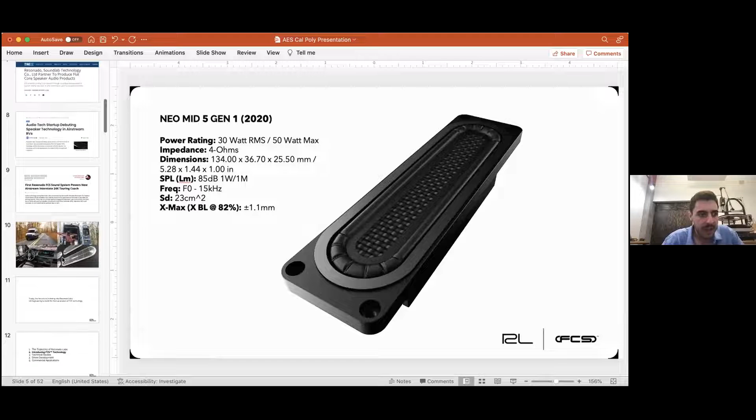This is the first transducer we developed. We call it the Neo Mid 5 Gen 1. We're working on a wide range of Gen 2 transducers, but this is the Gen 1 and a little bit of a fancy graphic. That Gen 1 transducer has been featured in Airstream RVs. Airstream is a premium brand of recreational vehicles, maybe considered top of the line, and this shows a few pictures of the Resonado sound system in the back of the doors.

We are working on a number of commercial applications beyond this that are more integrated into home audio. There's a very exciting soundbar project I want to talk about at the end of the presentation, and we'll look at that from the practical standpoint. That is using a very cool speaker driver we've engineered called the NW7, and it's a really good representation of FCS technology.

I'm also in Resonado's acoustic lab. This is the measurement component. We have a subjective listening room on the other side of that wall, but there's a few different pieces of equipment in here. Most of them are laser microphone setups that measure the displacement of the speaker and the input. We have what's called the Klippel system. Klippel is a German company founded by Wolfgang Klippel. Does anyone know who Wolfgang Klippel is, or have they heard of him?

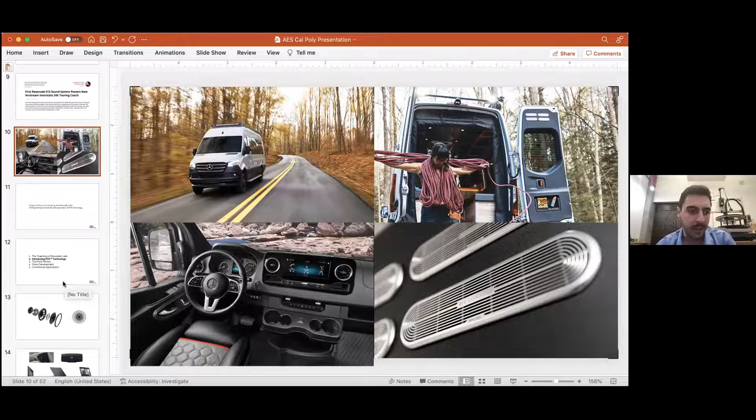But to get into the next part of the presentation, for the last many years, in all types of consumer electronics products, they're using just conventional circular speaker drivers. This is something we pulled out of a Google smart speaker; I just grabbed it from our shelving system where we have a lot of benchmarks. This conventional circular speaker driver design is very ubiquitous across the industry.

You have right here the speaker voice coil, right? This is the spider. The spider's the bottom part of the suspension. Then you have the speaker cone, and on the speaker cone is this surround. That's the second part of the suspension. Typically, most of the stiffness or compliance of a speaker driver suspension is in the spider component.

The spider is typically cotton, synthetic fabricated cotton, all sorts of special phenols, and it's impregnated with different materials to get certain stiffness parameters. That's where a lot of the compliance or stiffness of the speaker comes from. This is your magnet, and you have your pole plate.

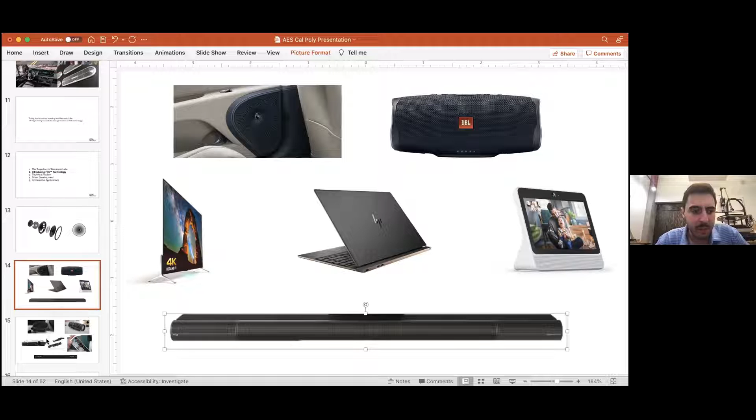The conventional circular transducer has been used for decades, but with all these products there are new form factors. They've required the use of what we call a high aspect ratio speaker: racetrack shape, basically non-circular. The reason you do this, take sound bars for example. Sound bars are a device a lot of people have in their homes now. I have a Klipsch Cinema 800 soundbar, and 80% of the people at Resonado have soundbars in their homes.

The trend with soundbars over the last 10 years is reducing the height. You want it to be a sleek design, fit under the TV, and not interfere with the TV IR reader. So the max height is pretty much 2.9 inches, but everyone's been trying to go lower and lower.

But when you reduce a soundbar's height, to maintain output and low frequency bandwidth, by output I mean SPL, your volume level, and by low frequency bandwidth your bass, your low end, you need to maintain cone area and displacement. To do that, everyone takes the circular driver and just elongates it, and you get a much more rectangular thing like this TV speaker.

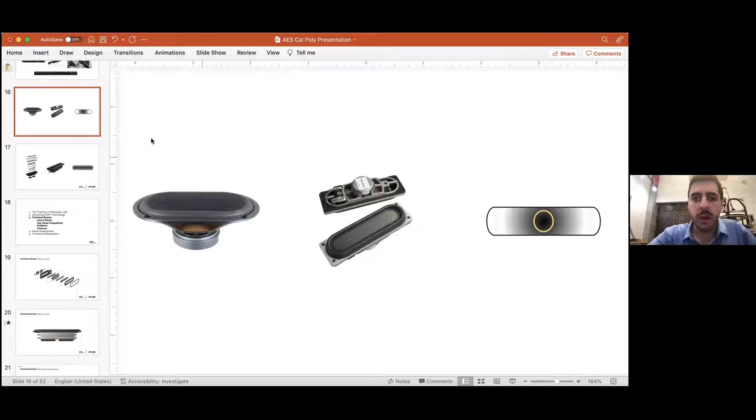When you go to a driver like this or like this, this one drops off at like 4 kilohertz, for example. And so you're losing all that response from 4 kilohertz to 20 kilohertz. And it's pretty easy to add a tweeter, and tweeters are low cost. That's what we see in a lot of cases, but there's also just a lot of distortion and negative effects from this.

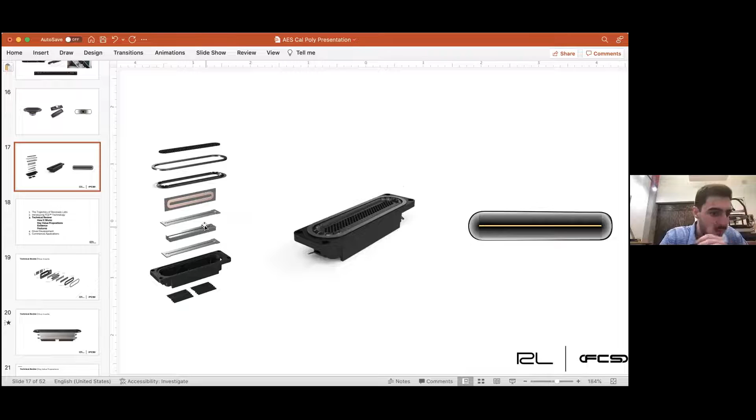And what FCS technology does, what Resonado has been focusing on, is we rearrange and optimize the geometry of each component, kind of as you were saying, Alex, from the ground up. The key component is we're taking the voice coil from this cylindrical structure, and we're putting it on a planar bobbin and winding it like this. And so you get 2 magnetic gaps.

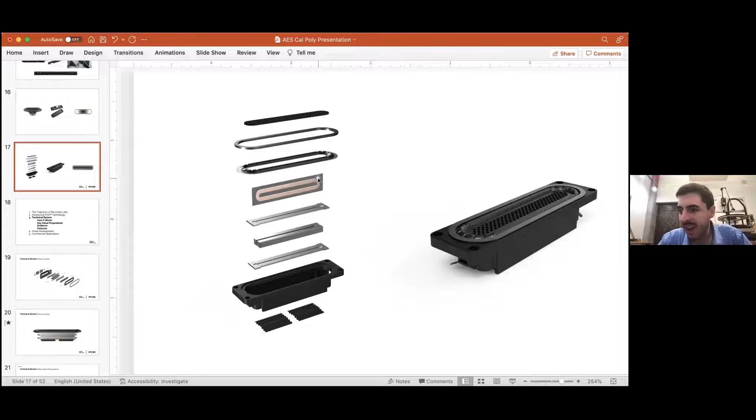Electromagnetics is not my specialty or my expertise, but you basically have this voice coil, and it sits in, these are 2 parallel bar magnets, and then you have your 2 pole plates or 2 yokes. And this voice coil goes up and down in there, and the bobbin supporting that diaphragm is along the entire length of the voice coil. And so you can drive the speaker much more planar and much more linearly.

And this page is talking about each of the parts, and we're gonna go through some of the components right now. But the big value proposition is the fact that we're driving the cone, the diaphragm, with the entire length of the voice coil, the entire length of the bobbin. The bobbin is what the coil sits on, that substrate, it's aluminum.

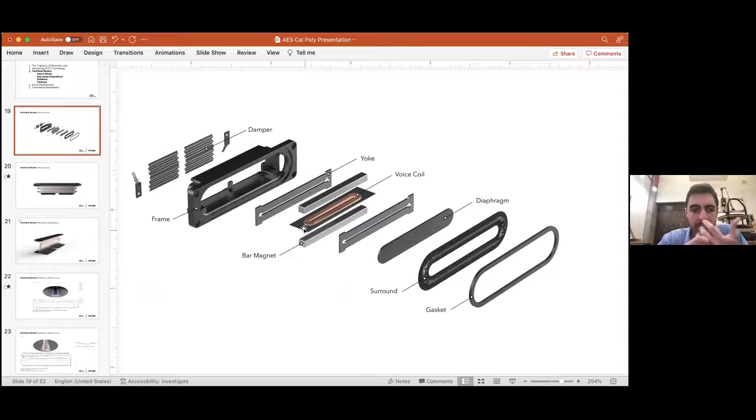To prove this, that I'm not talking gibberish, we'll look at some laser scanning vibrometer data. Does anyone know what a laser scanning vibrometer is? No. It's this device right behind me, and I'm not trying to shoot a home video and have my camera all over the place, so I apologize.

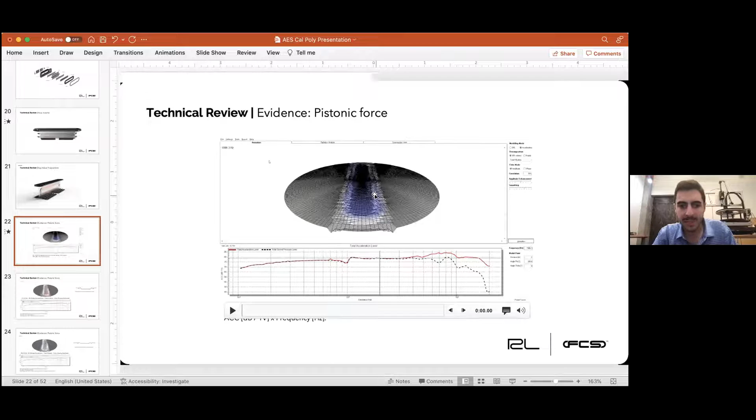But what it does is you have a speaker driver right here, and you basically have a laser, and the laser is measuring the displacement at very narrow increments, and the laser moves all around the speaker diaphragm as it's moving, and maps it out. We're looking at that data right here, and you measure it at certain frequencies, and what we're looking at right now is at 2 kilohertz, 2,000 hertz.

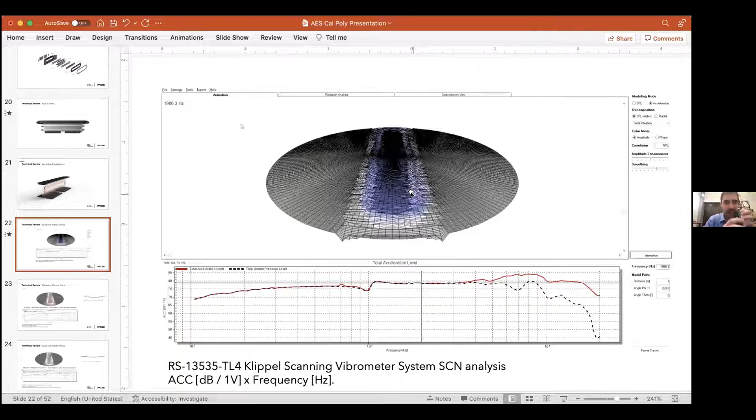The Gen 1 Neomin 5 speaker driver, Resonado technology, where we have the bobbin and the voice coil stretching along the entire length of the cone. And what you see is you get this consistent blue, and the colors, blue versus red, represent which way it's moving, and we're basically seeing how it's all moving together. And that's what you want to see.

We're going to go up to 5 kilohertz, and you see it's all still one color. Red means down, blue means up, but we're just making sure it's all moving together. It's pistonic.

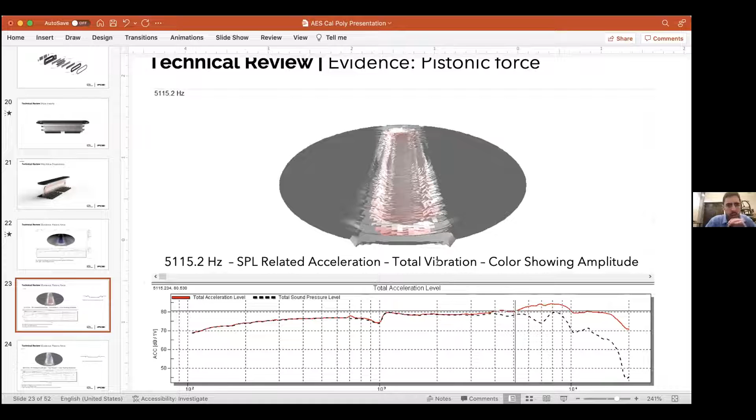You do see here a little bit of irregularity from the speaker surround right here, and that is a mode from the surround. It's a new patent, but if you look at this surround closely, you see that pattern. There's an official marketing name for it that hasn't been announced yet, but it's the wavy surround, and that breaks up some of these modes and keeps the frequency response very smooth.

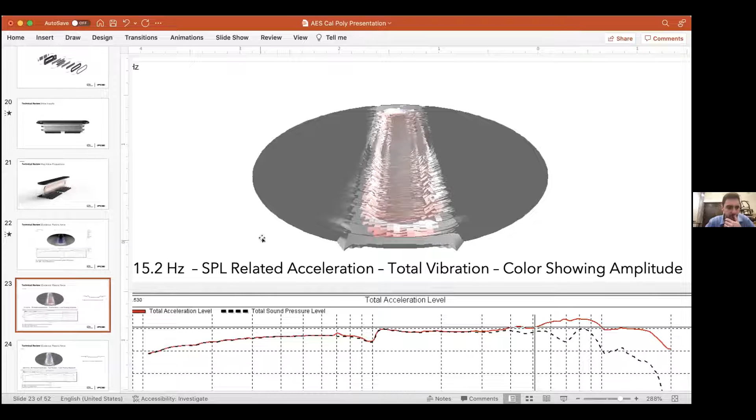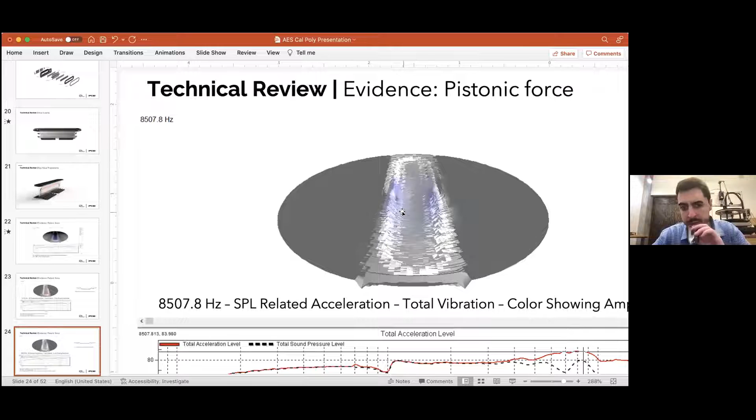If we go up to 8.5 kilohertz, we still see it's all one color, which means it's moving pistonically. If we were to look at a speaker driver like this, you would have so many different color gradients, and half of this would be blue and half of this would be red. We have that data, and we've measured it and compared it. Obviously, I do not have it in this presentation.

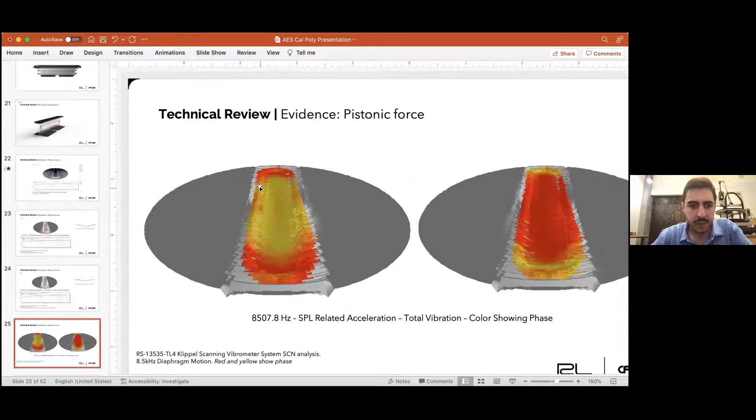We're still looking at 8.5 kilohertz, at a slightly different viewing angle, but the red and the yellow represent the same thing. You see a little bit of breakup at the ends here, right? That was because the voice coil we had was not extending to the very end of the diaphragm. It was maybe going to where my finger is on each side, and so the diaphragm flaps were not being beneficial.

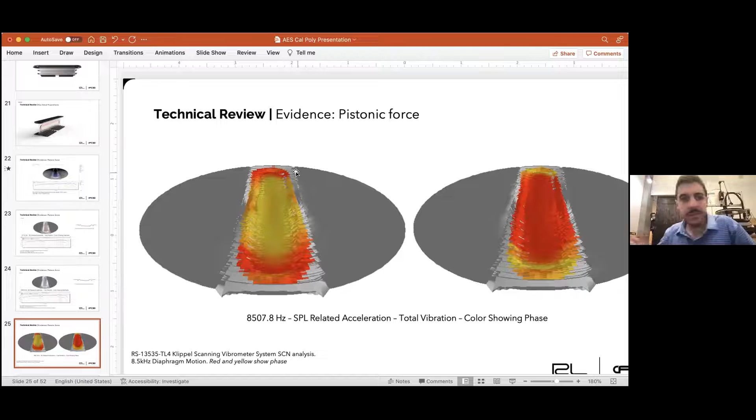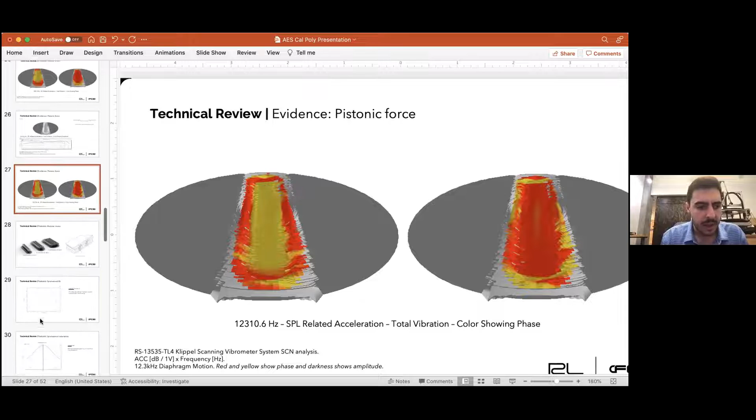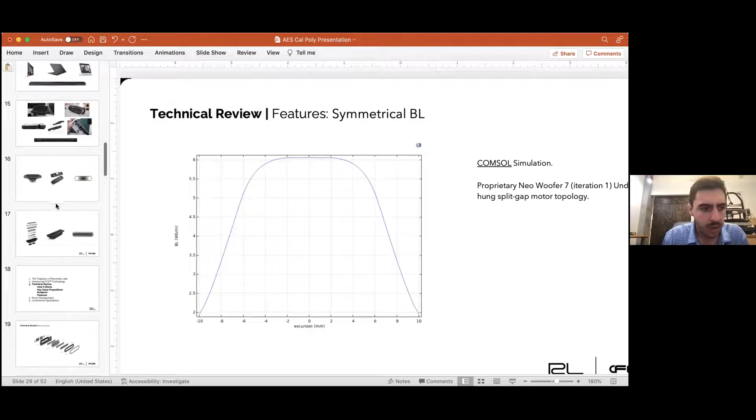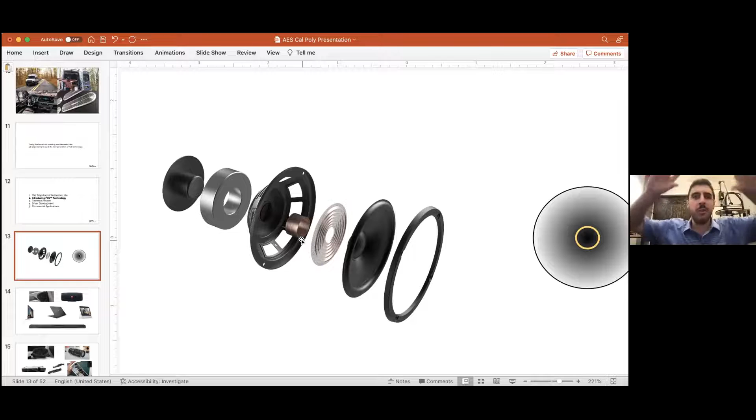To go into some of the other advantages of FCS technology, I was talking about the speaker suspension a little bit, which is giving you the compliance, the stiffness. For a conventional speaker, you have the spider, like a cotton material, and then you have the surround. Most of the mass in a speaker transducer is in the voice coil, sometimes some in the cone, it depends. If you think about it logically, it doesn't make sense to have both suspension components above where the mass is. It's going to be a lot easier to rock.

What we do with FCS technology, and this is a decent view, is we put the spider on the bottom, this is the FCS technology spider, and then you have the surround on the top. So you really get a more balanced mass and a more balanced suspension, more balanced compliance.

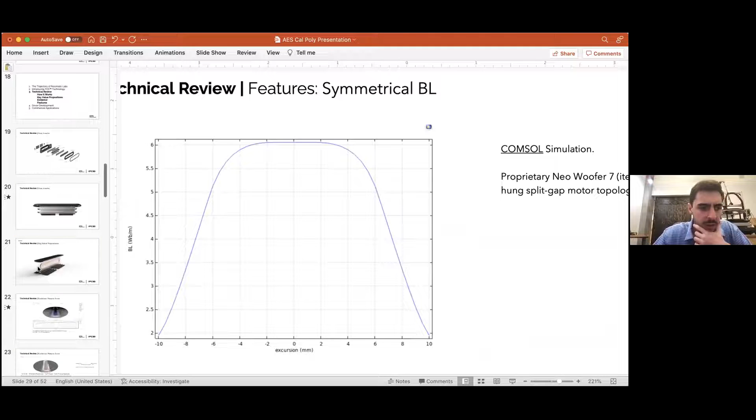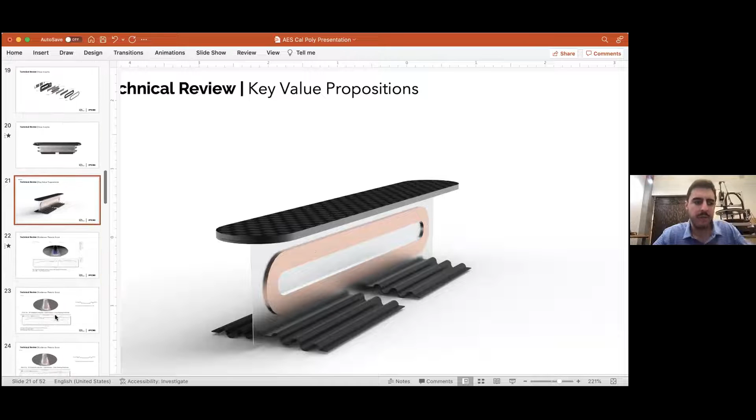Another advantage is there's automatically a symmetrical inductance and a symmetrical BL curve, due to this planar coil. You have two electromagnetic speaker gaps, where the top part of the coil is in the top gap, and the bottom part of the coil is in the bottom gap. The two gaps balance against each other, and they result in an inherently symmetrical inductance curve and an inherently symmetrical BL curve.

Now, the BL curve. I was going to say, are you able to go into, high level, why that's important? Yes, and I apologize, I should have started with that. The BL is measured in Tesla meters. It's called force factor, the speaker force factor, and it's really telling you how strong the speaker motor is.

You look at TS parameters, and there's five that really matter. There's the moving mass of the speaker, what's moving in the speaker: the voice coil, the cone, the surround, and the spider. So the moving mass is one crucial TS parameter. The BL is another, telling you your motor force. Another crucial TS parameter is your SD, your cone area, how big the cone is.

And the last crucial TS parameter I would say is excursion. Excursion is not an official TS parameter, but it's an unofficial one for those in the industry. But back to the BL, I got off track a little there. The BL curve is looking at your force factor over excursion. As the speaker moves up and down, the voice coil is moving through the motor gap.

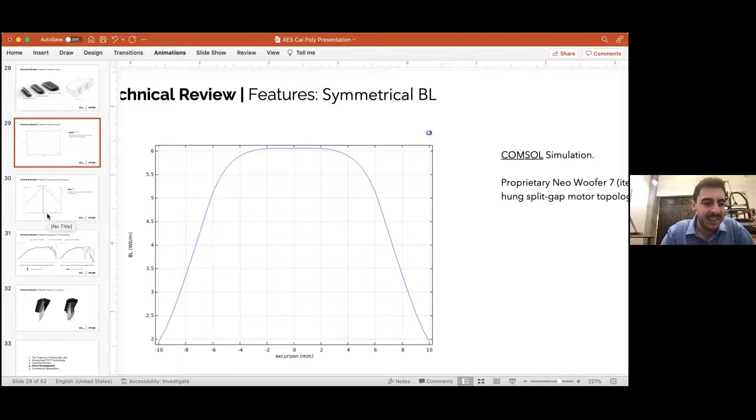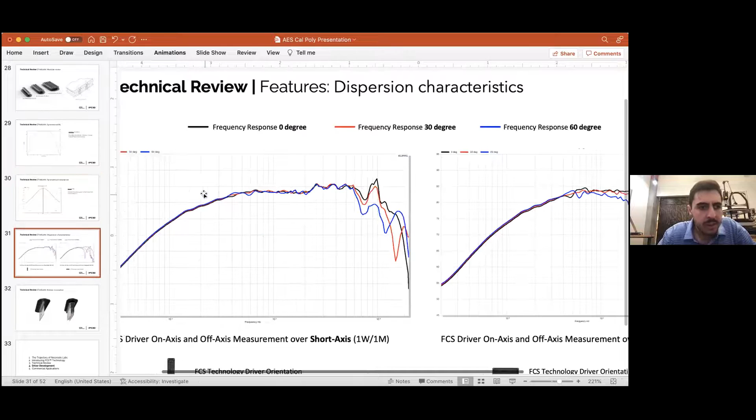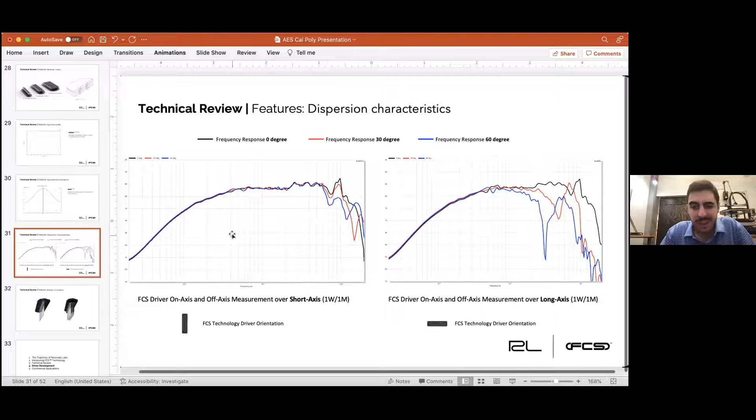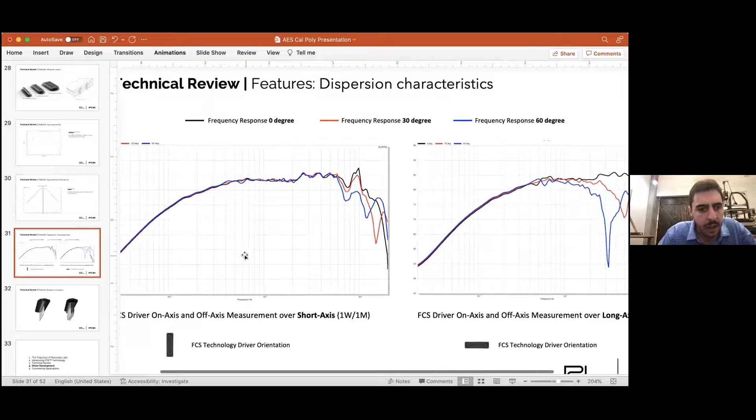If we position the driver vertically, when you say off-axis measurement, you're trying to determine how effective this speaker is going to be if you're not listening to it right in front of it, if you're not on axis or on the same plane with it. And that's very important, like in your living room, if you have bookshelf speakers and you're moving around, or you sit in a different place on the couch, you want very good off-axis response. So you want very little deviation for off-axis measurements to on-axis measurements.

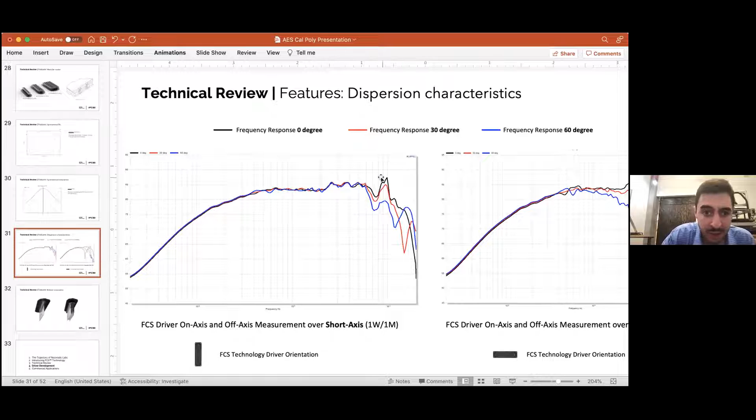This first chart is looking at if we place the speaker like this and we move the microphone across the horizontal plane. On axis, the microphone would be like this, right? And then off axis would be moving the microphone this way or this way. I think that makes sense. So we see with this structure, this aspect ratio, it provides very wide dispersion this way. The red line is 30-degree off-axis and the blue line is 60-degree off-axis. You see very little difference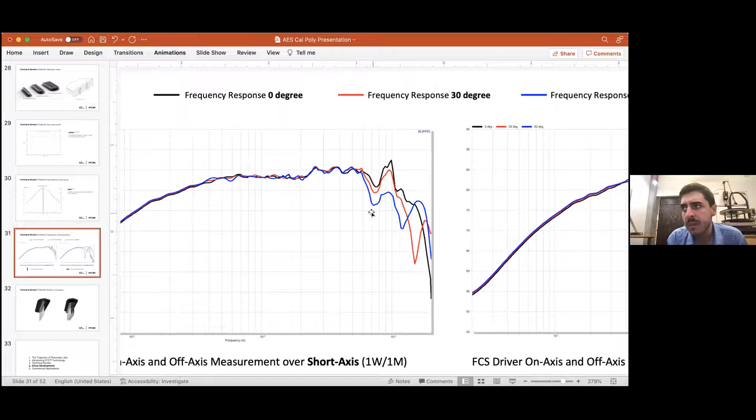at higher frequencies. And I think you guys understand this, but as we increase in frequency, the acoustic wavelengths become smaller. So at low frequencies where you have bigger wavelengths, it's a lot easier to get wide dispersion, which is why you see no deviation between the lines at lower frequencies. But at the higher frequencies, it's much more of a challenge.

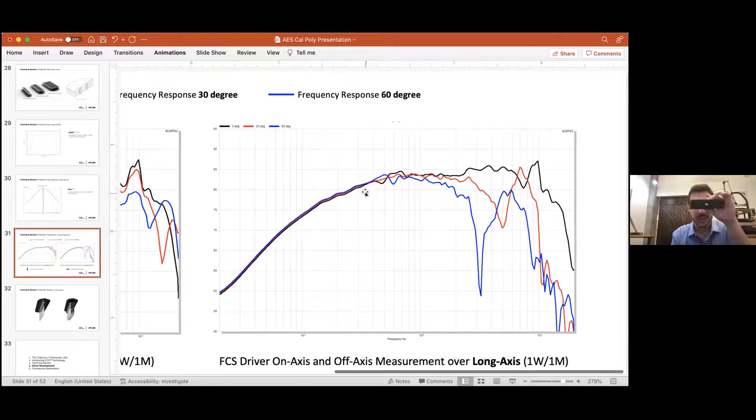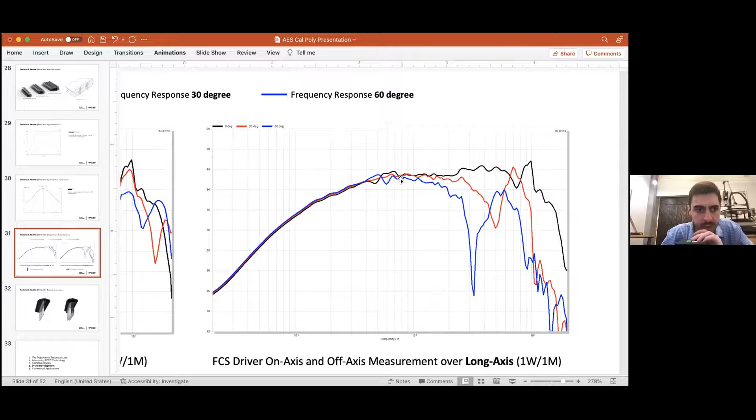If we put the speaker like this and we move the microphone in that same plane, so 30 degrees is 30 degrees, you're seeing substantial drop off. And this is a 5 dB scale, and 100 hertz, 1,000 hertz, 10,000 hertz, and you're seeing at like 2 kilohertz this really nasty, like 30 dB deviation.

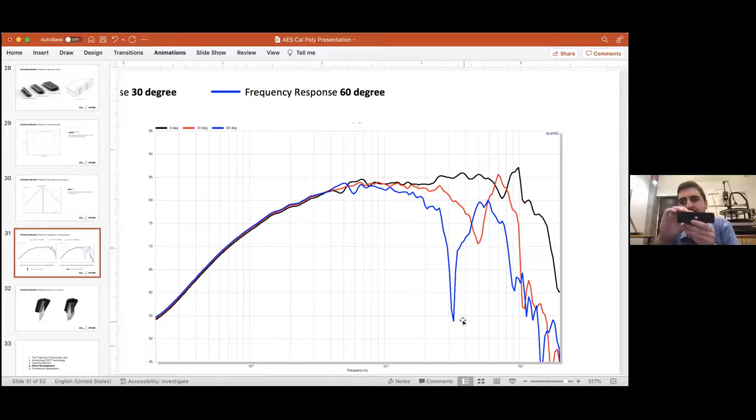That would sound terrible if you were listening to it, but you would always, in a lot of cases, if we're looking at like a sound bar and you put a speaker like this, you'd cross it over to a tweeter at like 2 kilohertz or like 1.5 kilohertz, just to ignore all this. We don't want any of that.

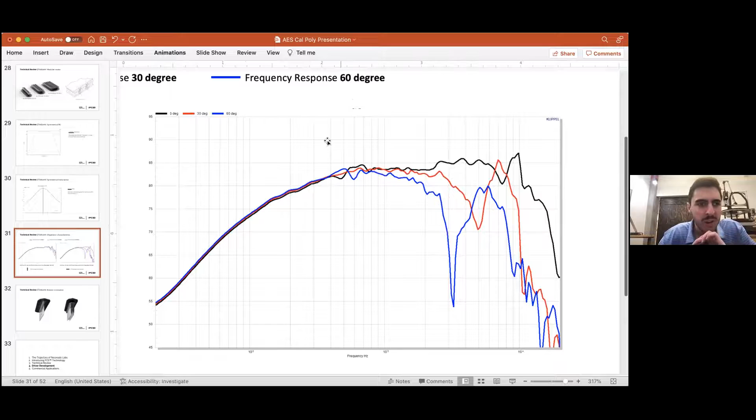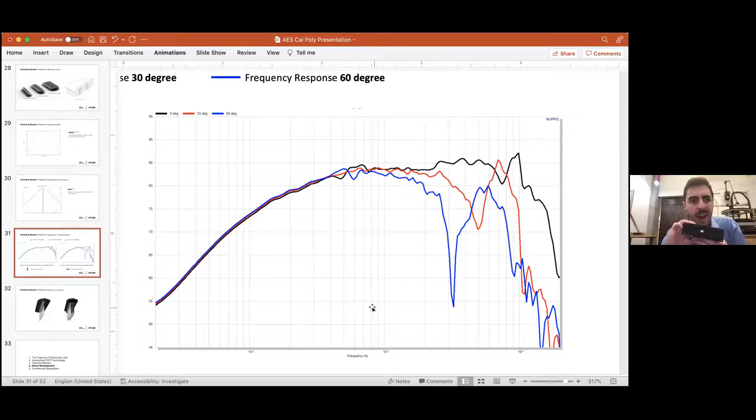And these off-axis characteristics are not due to FCS technology specifically. It's due to just the aspect ratio of the cone. And it depends a little bit per speaker, and it depends on the cone material. This is like paper honeycomb, but it's the aspect ratio. So it's not necessarily FCS technology, but you see that you don't want to be using a speaker in this aspect ratio full range. In this aspect ratio, however, you do. Think about it like you could have a really nice pair of bookshelf speakers like this.

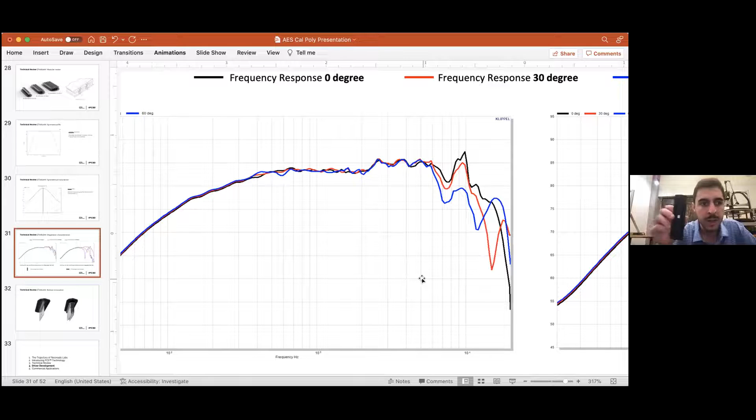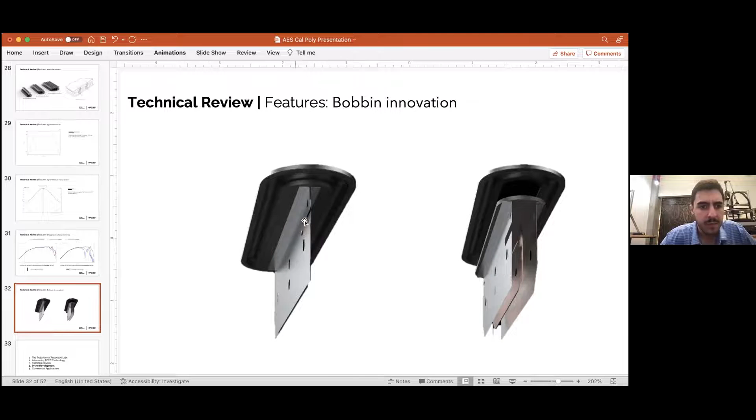The last benefit of FCS technology: you get a lot more power handling due to the planar coil, and you have both bobbins as an aluminum heatsink, and so that enables you to drive the speaker a lot harder without reaching your thermal limits.

This slide specifically is showing a structure we made, a technology innovation to increase the bobbin, the voice coil stiffness. A circular speaker driver with a circular voice coil, a cylindrical shape, a circular bobbin, you get a lot of inherent stiffness. Mechanically that's an optimized structure. It's a lot less stiff to go to just a plane than it is that circle. And so one of the challenges we've had is trying to maintain that voice coil strength, because that is what's driving the speaker cone up and down.

And so this is like a box beam structure mechanically, doing two planes, two pieces of material in this box beam connected on the top and on the bottom, but also connected in the middle. It's called the box beam. It's a lot stiffer than just one plane.

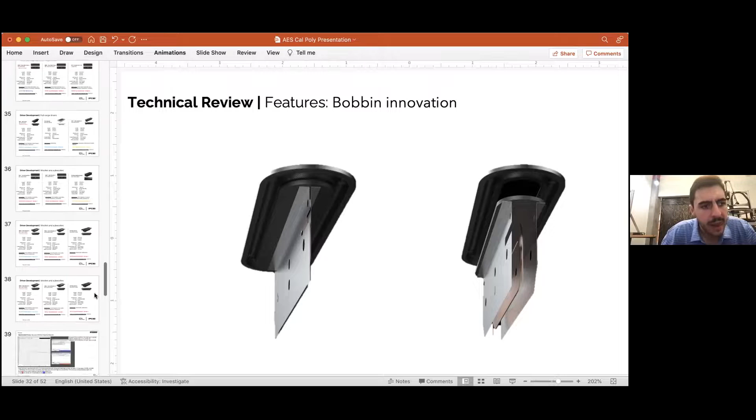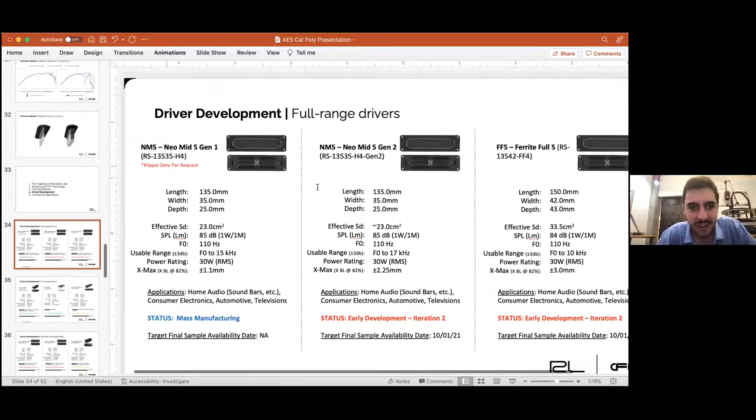I wanted to talk a little bit about how you evaluate a speaker driver, and I'll talk for 2 minutes on it. If we look at this Neowoofer 7, the information here is outdated, and the Neowoofer 7 is finished. But we have listed here 6 acoustic parameters, and these are the acoustic parameters that you want to be looking at, how you judge a transducer. If you want to build a soundbar, there's hundreds of transducer spec sheets and hundreds of different specifications, but these are kind of the key ones you need to look at.

I had talked about the 5 golden Thiele-Small parameters. This is a little bit different, but they're very related. The SD is your cone area. The more cone area you have, the greater output you can have. It's simple physics, output in SPL. LM is a measure of output, your sensitivity, 1 watt, 1 meter. Your F0 is your resonant frequency. Your usable range is your frequency bandwidth. Power rating's important, how hard you can drive the speaker, and then your excursion.

One of the 5 golden Thiele-Small parameters is effective SD, and another is your X max, and the other parameters like your moving mass, your BL, kind of funnel into this SPL number.

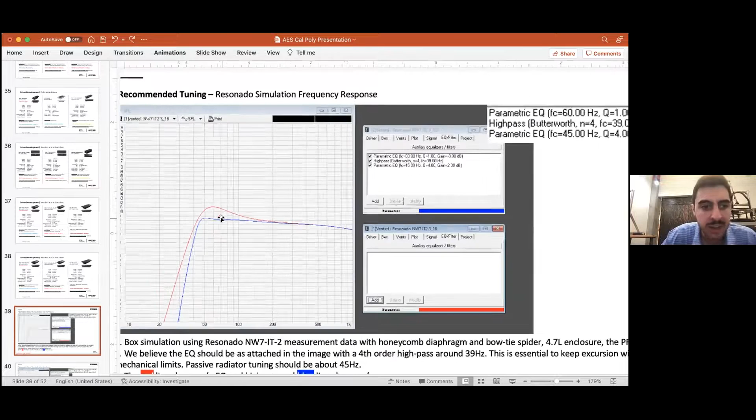But you basically enter the Thiele-Small parameters, and then you get this red line, and the red line shows that at 50 hertz, we have almost 100 or a little bit more than 100 dB of output at 50 hertz. Normally, most soundbars, like a lot of Samsung soundbars, they're not getting 100 dB to 100 hertz. A challenge with soundbars has been getting more low frequency output without that separate subwoofer, and the solution that FCS technology enables is higher

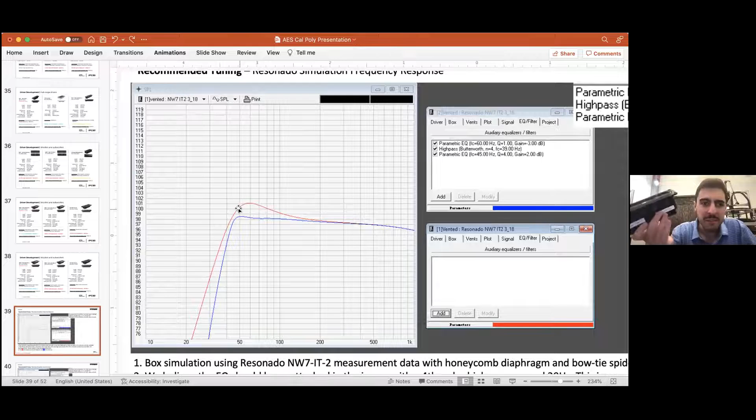you can use this like a subwoofer driver for a soundbar, but super high excursion. It's also like a mid-range driver and a subwoofer driver, and that paired with tweeters can enable a really wide bandwidth for a soundbar. And what we see is a very good low frequency output. You can see we have a fourth order high pass at 39 hertz. And then we have a couple parametric EQ things to tune down this peak that you see in the red line, and it results in the blue line.

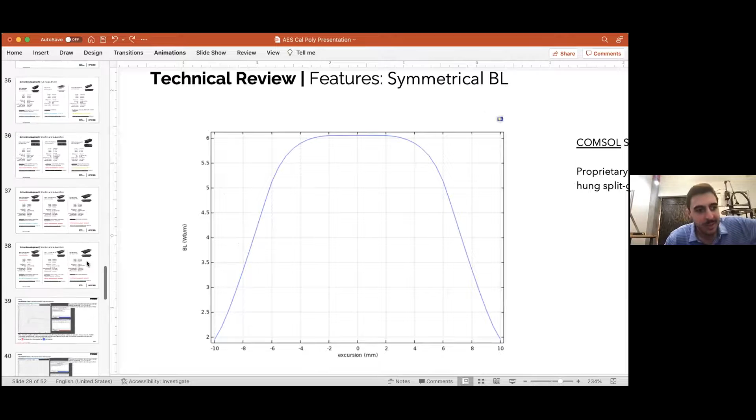The specific specification we use is Xmax XBL at 82%. And it's basically, if we go back to that BL curve, at what point is the BL at 82% of the peak? And so 82% of 6 Tesla meters is like 4.8 maybe. And so if we go to 4.8, you see it's like -6 and then +6. And so that's the XBL at 82%. That's the excursion spec. The last thing I'll say is if you're looking at a transducer and they don't have the excursion listed, they don't really know what they are talking about. It's all about displacement, how much you can move the speaker and the amount of air you can move.

I covered a few different topics there, and I tried to keep it not too technical in the weeds, and tie it back to real life. But what questions, where could I expand further? Where did I lose everyone?

Well, yeah, I thought that was an excellent summary of a bunch of really important things. I was kind of curious because it looks like this is a more premium kind of target you're looking at. I could see this being used in products where people really care about the hi-fi kind of stuff, but it's also about form factors. So is that the target? Am I correct in that assumption?

Oh, so FCS technology, it's all about high performance in the high aspect ratio form factor. And I probably did not make that clear thinking through how I went through the story. And so you can look at current soundbars that are 3 inches tall, and we can put a driver in there at that 3-inch tall height that performs better than the other speaker drivers.

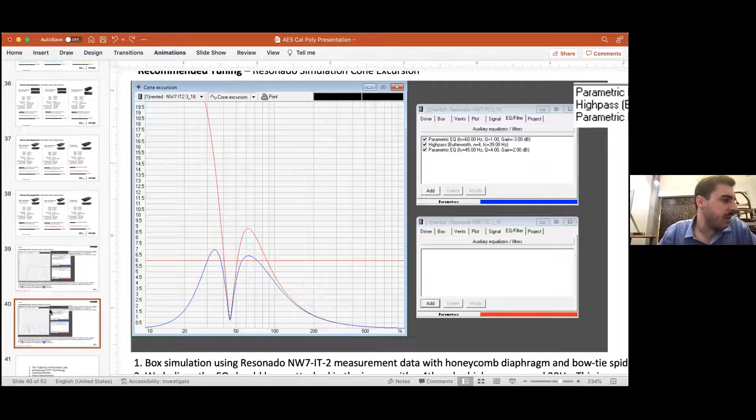The Sonos Beam is flat out. When I say flat out, I mean at what frequency is your frequency curve going to be flat? And the Sonos Beam is like 70 or 80 hertz. So this is enabling it to be flat out closer to 50 hertz, 45 hertz, and it's premium, but not too premium. Does that answer your question a little bit, Alex?

Yeah, that helps. I'm curious, we've got time probably for like 2 questions. If you guys have anything that you're wondering about, or anything Peter said that you'd like him to go over again? Yeah, that was going to be kind of my closing question in a sense, but I'll just jump to that.

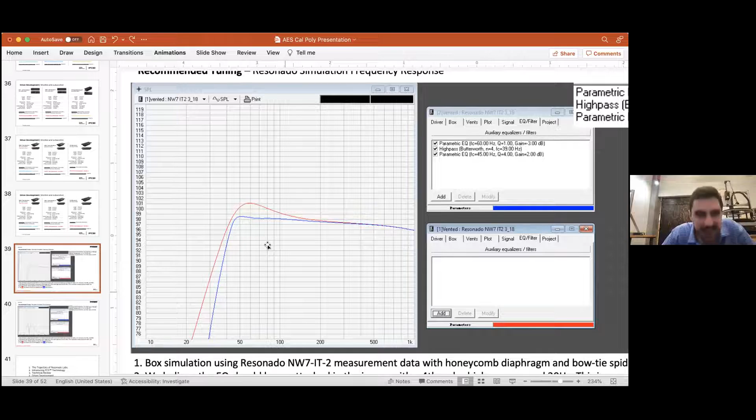So I sent out the email for the 2 job descriptions that you sent. One of them is a transducer simulation engineer, and one of them is a junior systems architecture and testing engineer. I think it's always helpful to talk to people in the industry, because what you do in school looks very different from an actual job. So are you able to illustrate what those jobs look like? That's a great question. That's a really good question.

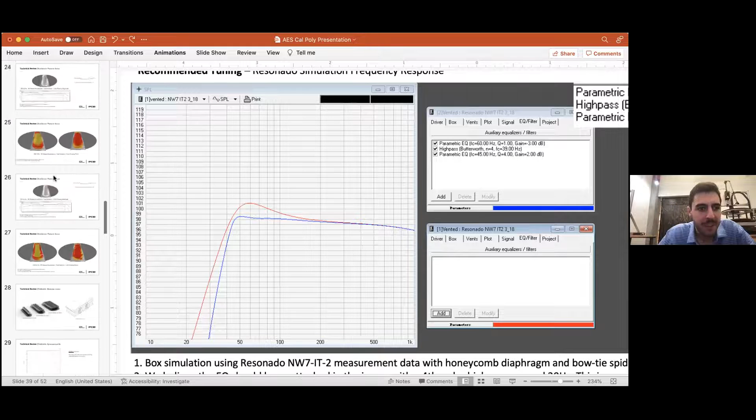So if we start with the system architecture and testing engineer, designing a transducer is extremely... Resonado was trying to design reference designs for FCS technology transducers that our licensees can then adapt and slightly modify per product. The reference designs are supposed to serve as examples. But to make that reference design, you really need to have a good understanding of the end product constraints.

So this transducer was targeted at a soundbar from the start, and we had to make a lot of assumptions, and do a lot of measurement and benchmarking to figure out the end parameters of the system, what experience we want the person in their living room listening to this to have, and then make assumptions on the system parameters you'll be able to generate, and then design the transducer from those target specifications, assuming certain system requirements, to deliver X end user environment.

So it's very important. You need a really good system understanding, a very good understanding of soundbar internals, like soundbar amplifiers, soundbar performance, the end user experience, just in order to start a transducer product positioned well. So the system architecture and testing engineer is going to spend a lot of time looking at soundbars, smart speakers, and the system as a whole, and that guides the decisions we make from a transducer development standpoint. How much excursion do we need this transducer to have?

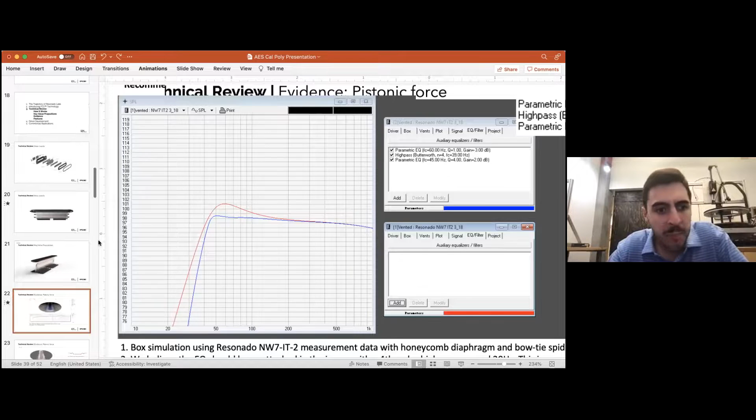How big are our magnets? The system architecture and testing engineer comes up with a list: okay, we want to make a driver that's positioned for this industry, what are the parameters that we need? It's like, okay, we want 80 dB. That's what the system person says.

The simulation engineers are going to be looking at, okay, how big magnets do we need? How big of yokes? What's our motor geometry? They're going to be using multi-physics software. We use COMSOL, but we also use a couple different programs to really design the speaker motor, the speaker voice coil, the speaker suspension, and we've...

Old speaker engineering, conventional traditional transducer engineering, is like, oh, we want a speaker with a little bit more SPL, let's put a bigger magnet on it. That's a lot of what they do in Asia, and have done. Nothing against Asia, but that's kind of the less advanced engineering, and it's what you see when you go to some of these traditional Chinese speaker factories.

But the new wave of speaker engineering, like what Harman started doing and what Sonos does, is using multi-physics software like COMSOL. You get really into the nitty-gritty with all the different parameters and specifications, and you really parameterize and simulate and design something for those parameters, and then it makes the product development process a lot easier,

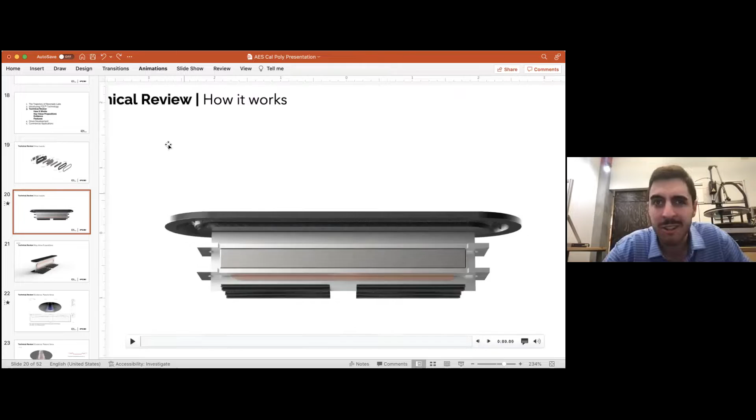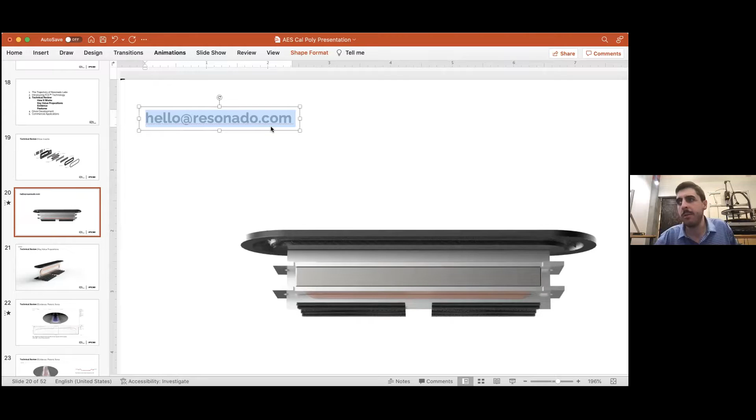I believe there's a couple individuals from the AES Cal Poly program who have reached out, who are in the pipeline. Some of the positions have experience required, but we really just want people willing to work hard and be curious and learn, because there's no way we can ever expect a senior, one of you guys, to know much, just because it isn't taught.